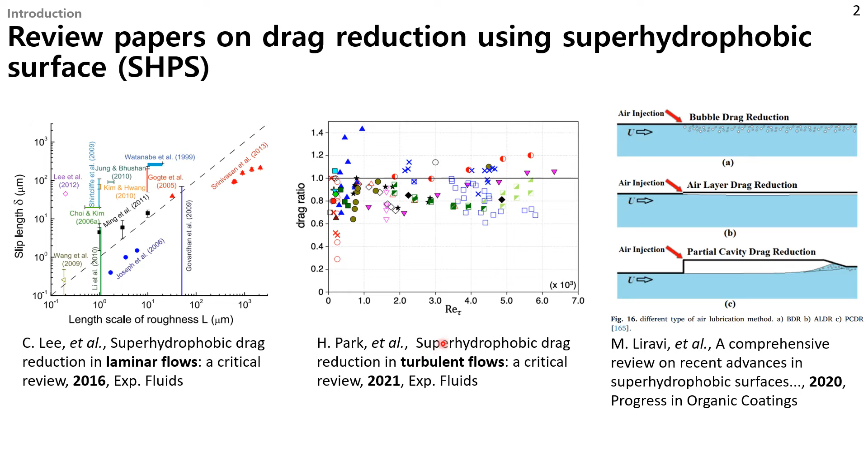However, according to Liravi et al., the air lubrication methods were often used in many turbulent conditions, and in this case, the stability of air pocket is very low for available surfaces. So an essential work which should be done in future research is trying to stabilize air pockets or air layer on superhydrophobic surface submerged in water.

Recently, our team led by Professor Dong Rip Kim have developed a novel superhydrophobic surface. It is made of PDMS and has a unique porous structure that provides a superior air retaining capability in water. The hierarchical structure of porous PDMS film was precisely controlled by ultrasonic spraying, so that small pores are in contact with water and large pores are located deep in the film. Then PTFE coating is applied to increase its durability.

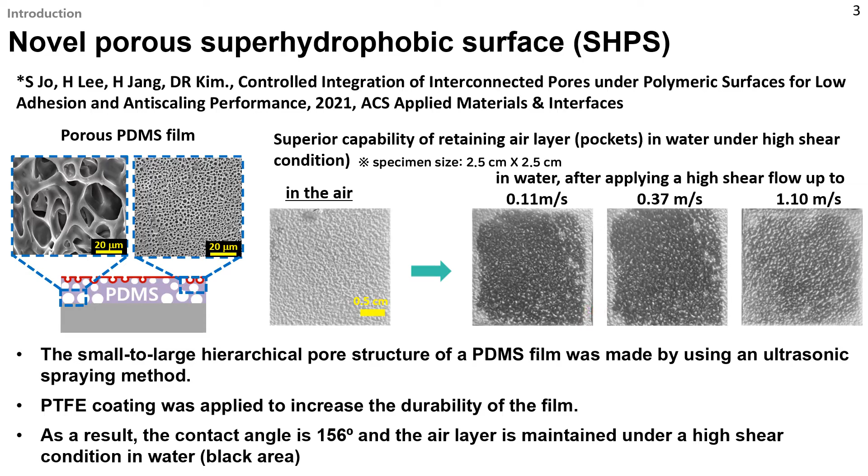As a result, the contact angle of 156 degrees was obtained, and we found that an air layer was well maintained under a high shear condition in water. Our research object is to investigate the drag reduction caused by the air retaining superhydrophobic surface.

First, to develop a Taylor-Couette flow device to measure torque precisely over a large range of Reynolds number with a single working fluid. The second is to visualize the Taylor-Couette flow field by using PIV. The third is to estimate the slip velocity and slip length.

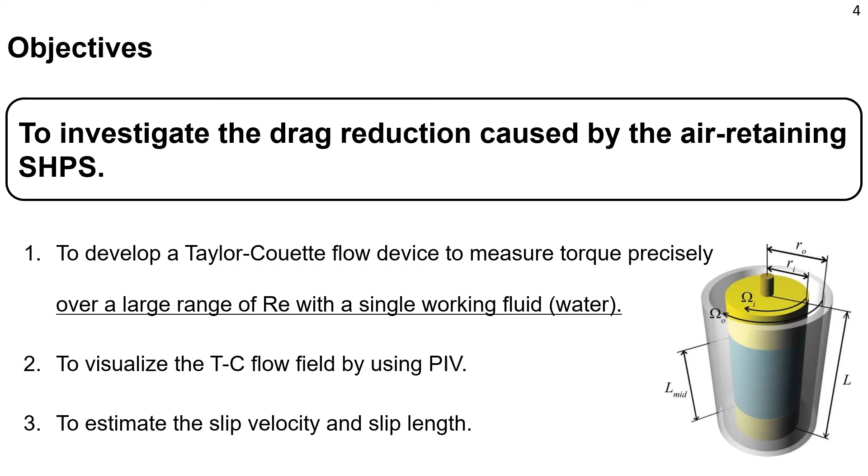This is the schematic of Taylor-Couette flow device that we developed. It consists of two concentric cylinders, a torque sensor, motors. The height of inner cylinder is 220 millimeters, and the gap is 5 millimeters. A Taylor-Couette flow device is known to be suitable to measure torque precisely over a large range of Reynolds number simply by controlling the angular speed of circular cylinder.

An issue here is that we need to maintain a single working fluid, which is water, over a large range of Reynolds number, because we examined the drag reduction by the air layer on superhydrophobic surface. I'm not going to go through the details of the device setup today, but we were able to operate the device over a shear Reynolds from 1,000 to 20,000 by taking into account a small torque of bearing.

This on the right is the PIV system for visualizing the velocity field. It is a PIV system that can measure streamwise and wall-normal components of velocity vector.

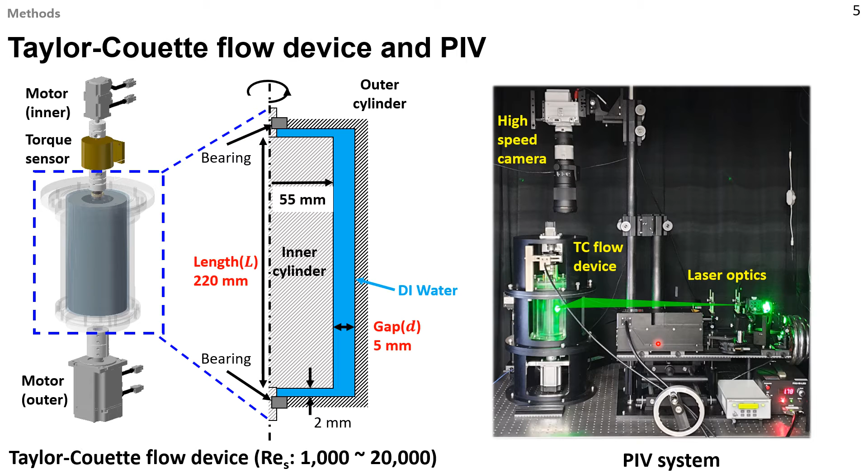To validate our Taylor-Couette flow device, we compared dimensionless torque measured with a no-slip condition against other data published in literature. This graph shows dimensionless torque versus shear Reynolds number. As you see here, the Reynolds number was covered from 1,000 through 20,000 with a single working fluid. Regardless of Reynolds number, our data are in good agreement with other data.

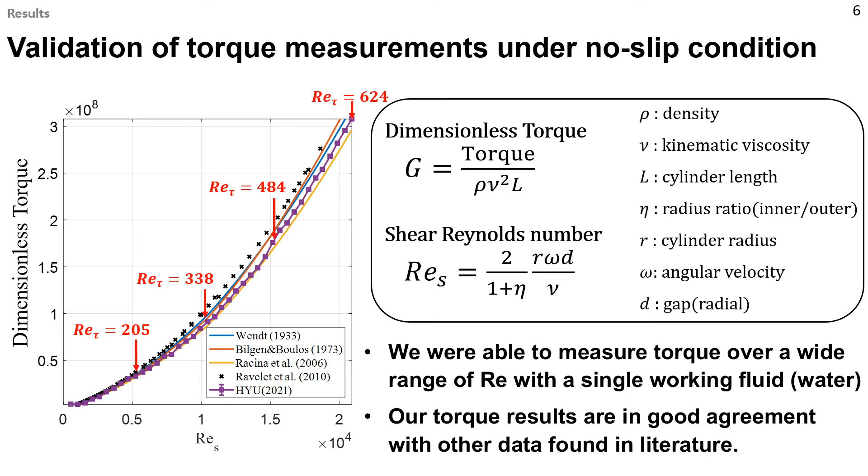Now this is a validation of PIV measurement against DNS result. We performed DNS also for the same geometry of our Taylor-Couette flow device at Reynolds number of about 1300. This graph shows angular momentum plot. Due to persisting Taylor-Couette vortices at this Reynolds number, the angular momentum was ensemble averaged along the axis of the Taylor-Couette device. The average angular momentum shows good agreement between PIV and DNS result.

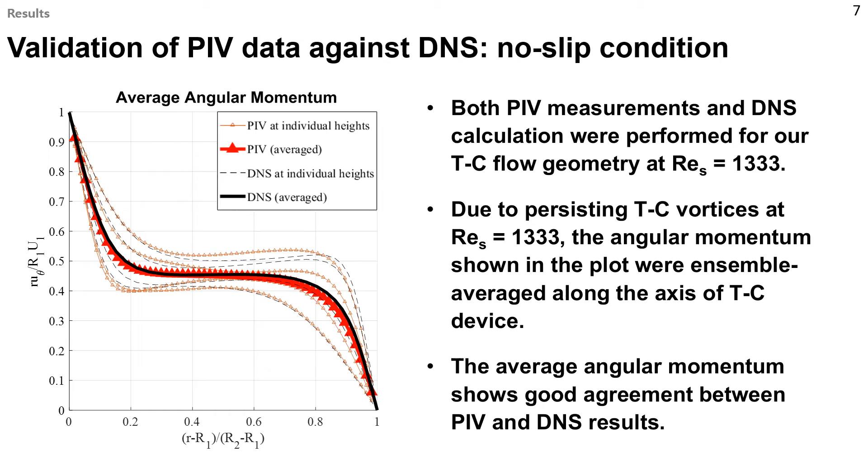Now, this shows results of drag reduction. The effects of porous superhydrophobic PDMS surface on drag reduction were examined by comparing them against the same size but bare PDMS. Both PDMS films were attached on 1/5 of inner cylinder. This dimensionless torque was calculated under an assumption that the entire cylinder was covered by its PDMS in both cases. As you can imagine, the drag reduction rate was different at a different Reynolds number.

It was reduced by 80% at a low Reynolds number of 3000 and by 8% at a high Reynolds number of 16,000. As you see here, these are pictures taken after torque measurements. The air layer or air pockets were still maintained on the porous superhydrophobic surface during torque measurement. I know that it is hard to identify the air layer with these pictures, but if you compare them to a picture of a surface without the air layer on it, you can see the difference.

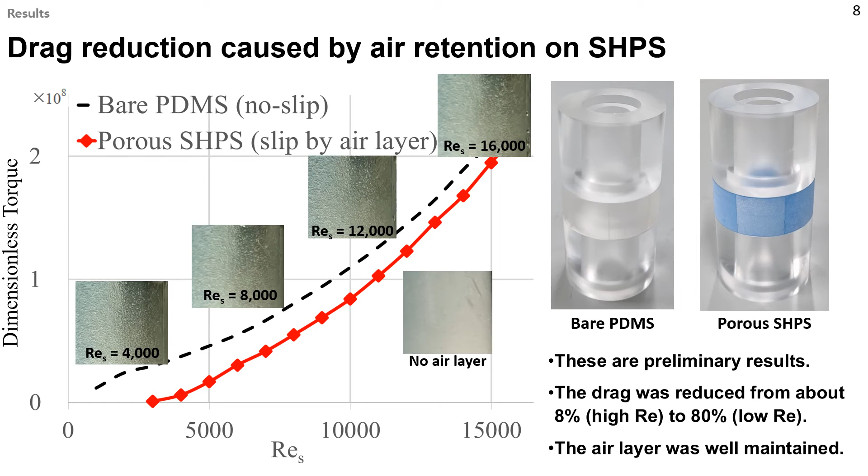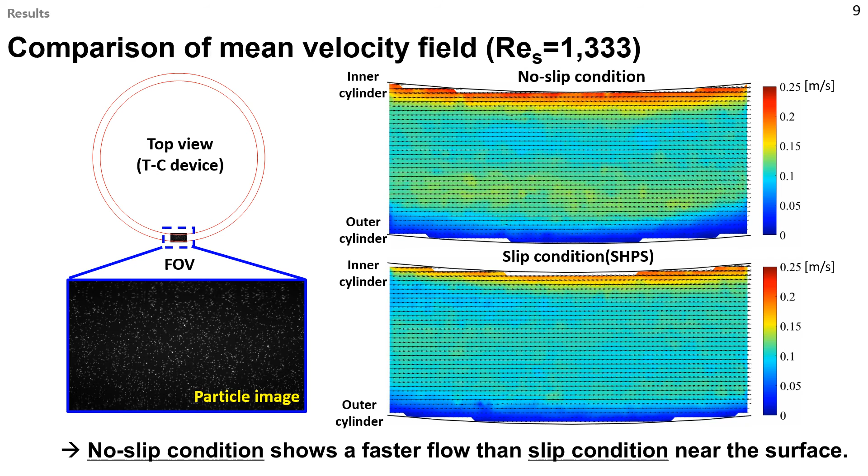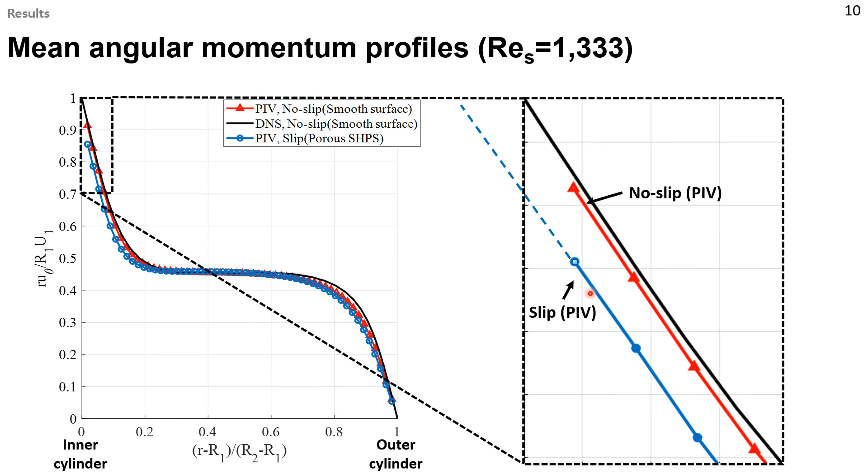The porous superhydrophobic surface shows 14% less momentum than that of inner cylinder near the wall. With this data, we simply estimated the slip velocity and slip length, 17.8 mm per second and 98 micrometers. We are still working on this project and hope to get data at high Reynolds numbers soon.

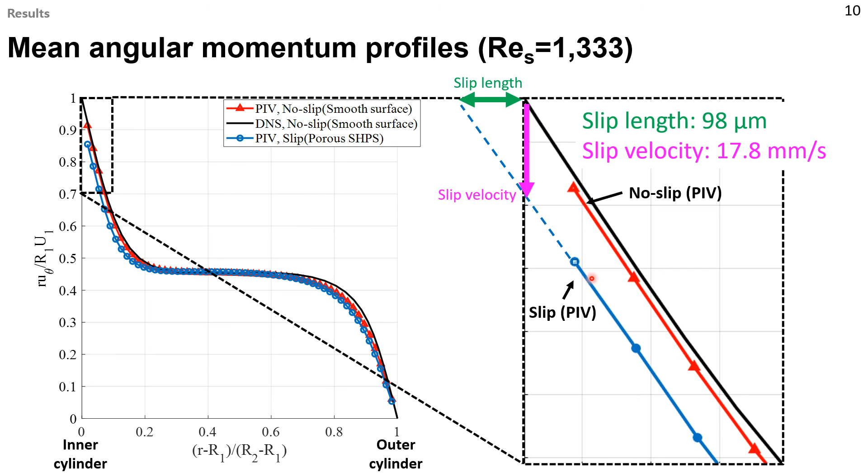Finally, our conclusions are: we investigated drag reduction by the air retaining superhydrophobic surface by using Taylor-Couette flow device, and we measured the torque and velocity field of the Taylor-Couette flow device for a wide range of Reynolds number using a single working fluid. We found that the drag was reduced from about 8% to 80% on superhydrophobic surface.

The results of PIV measurements indicate that the slip velocity is 17.8 mm per second and slip length is 98 micrometers at Reynolds number of 1300. More data will be collected and analyzed at higher Reynolds number in the future.